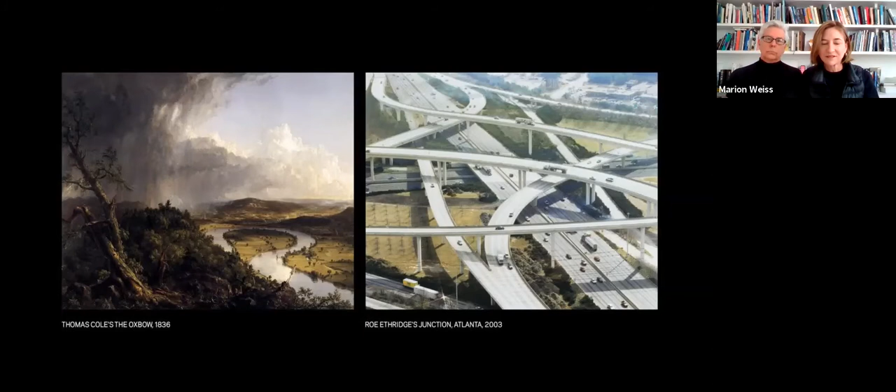While the range of each discipline has expanded, arguably one could say that heightened disciplinary distinctions have also emerged. We believe they're largely administrative, and they've placed artificial boundaries on the extent and ambitions of the architectural project. We think this is a poignant situation, particularly as we reflect on this deeply tragic pandemic that we are part of right now, which illuminates the necessary connections between all the arts and sciences to address the most globally pressing challenges of our time.

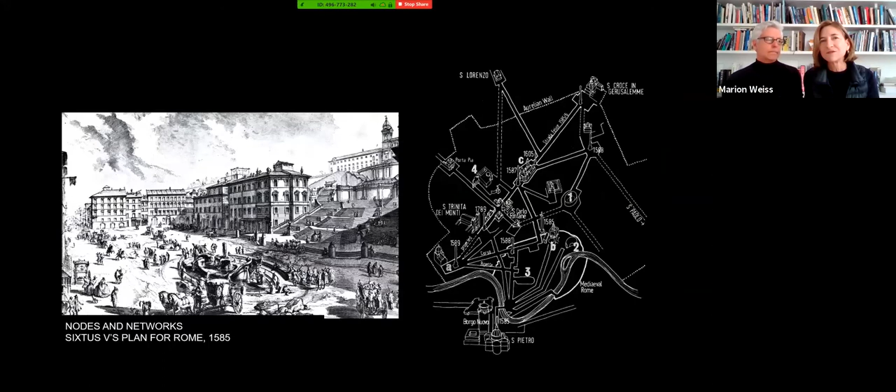There's a temptation to say that there's a utopian ideal for the perfect, contained, fortified world, whether it be the Renaissance ideal city or even the temporary encampments where encircling the wagons was the idea. Yet we believe there really is more of a networked idea, where we could leverage topographies and infrastructures to create new cultural destinations.

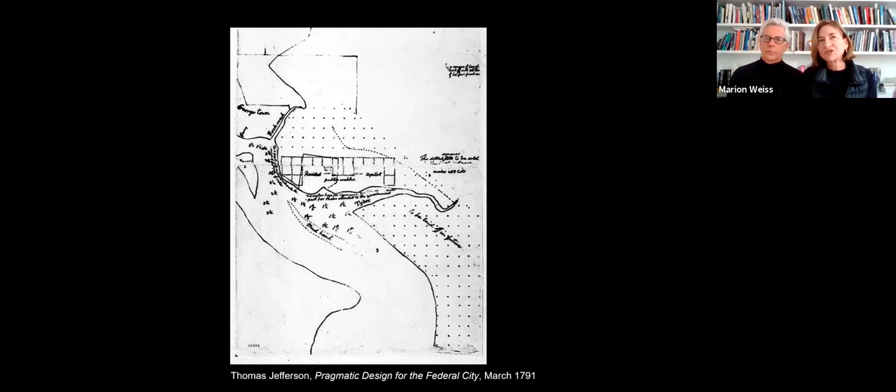Jefferson had such a strong feeling about being able to literally give measure to a site that might be amorphous between land and water, to in fact situate an idea in his drawing here for Washington, D.C. as a national capital. As he was stretching this east and west, it really was an image that we looked at with great care.

We entered the Women's Memorial Competition at Arlington Cemetery, our first project that launched our practice. Jefferson's vision was one that was carried across the river with the Memorial Bridge and terminated at Arlington Cemetery. This memorial, built to honor the women who'd served in the military since the Revolutionary War, became, in a sense, a site where an unrecognized group and an unrecognized retaining wall had an opportunity to take a forgotten site and a forgotten subject and actually break barriers, literally and figuratively, through this old retaining wall—to create a place and a space for recognition of the women who'd served.

In this first competition, which launched our practice, we had to work with the walls and retaining walls to break through the artifact of this 1927 retaining wall to create a space of light and education. Through that ascent, we connect to Arlington Cemetery grade, which with a 200-foot diameter arc of glass tablets could become literally like a journal with the binding broken, with inscriptions of and about the women who had served, becoming a luminous landscape as a foreground to the cemetery, but also allowing the sun to treat it like a kind of light narrative, so the shadows could tell that story inside the memorial gallery as well.

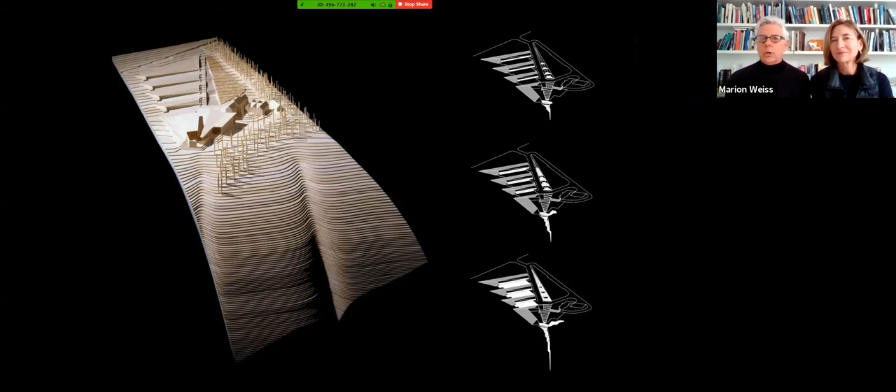A small museum engages its incredible site and organizes parking so that water can be collected. Increasingly, water is a precious resource, and even upstate New York, the presence of water being cleaned and allowed to reemerge into Lake Cayuga was an important driver for this design.

Water is actually, in a way, the first part of this narrative. You can park your car. Parking is concealed between a series of berms where water is collected, cleansed by equisetum, and then carried in this very long, very processional trough. That trough then allows you to register the entry to the museum.

Rather than one building, we broke the museum into two pavilions with a shared entry plaza, and those in turn are connected below grade, so the buildings are nested into the topography. They become part of the landform themselves. You can start to see the development of this idea where architecture both emerges from the land but is also emergent from the land, and in turn embeds itself into the topography.

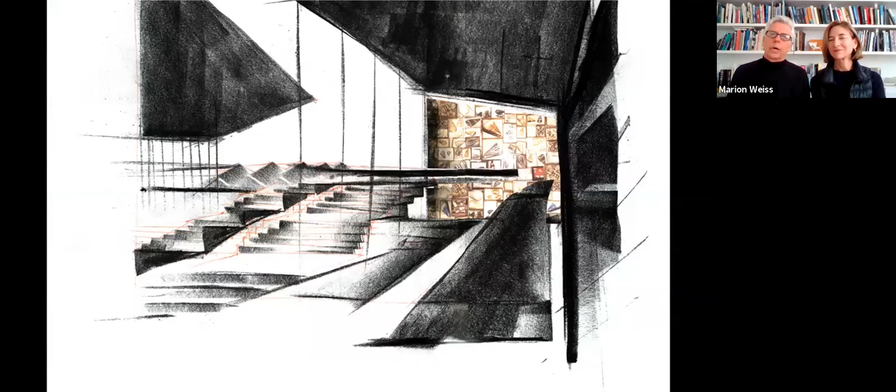Rather than create the typical black box museum where natural history is described in small, precise dioramas, we wanted to make sure this story, the story of the Finger Lakes, could be connected to the region. So the fossils displayed in this museum are found in the landscape itself, in the geology of this region. It's an idea of a kind of Guggenheim in reverse.

You enter in the present and are confronted with a right whale, this beautiful skeletal structure. Then you descend down to the lowest level where you can see a Devonian fossil, and in that fossil is the skeletal remains of a trilobite. You can remark on the similarity between present and past. That sense of being below grade in the earth is as much an idea of procession as it is revealing the artifacts of the earth.

Water is collected, as I mentioned, between these two pavilions, deposited into a glacial garden. At times it freezes. The concrete itself is produced with local stone, so it has the character of the stone you'd find on site, and in fact the imperfections of the concrete reveal a series of fossil-like indentations in the concrete itself.

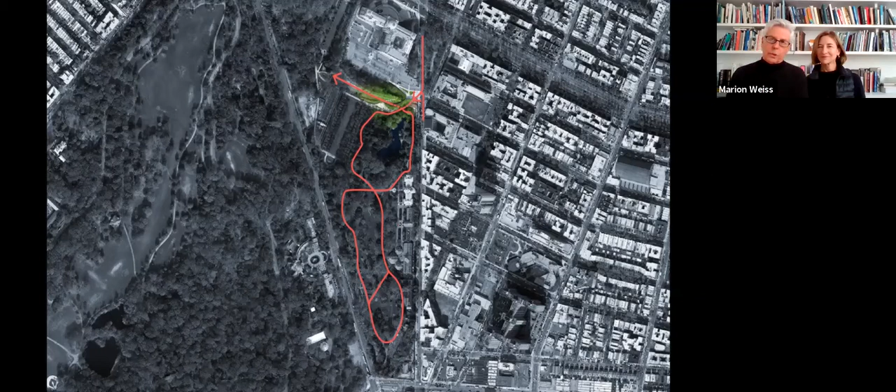So how to transition from city to garden? Rather than create a discrete, single, beautiful building, the idea was to think of the building as part of a journey, part of a narrative, a sequential act that was as much a part of the garden as it was the city. Those explorations, the origami-like studies where the building could dissolve into the garden or assert itself into the city, are evident in these early study models. So the building is overtly architectural.

As it presents itself to the city, it's broad, there's a welcome plaza. You can slide under the building, under the canopy, and never enter the building. In some sense, it's our idea that this building and other projects not be seen as objects unto themselves, but fragments of a much larger context.

So you can slide around the building, you can see it panoramically. The building's actually 400 feet long, but you never quite experience it that way. It's always an idea about seduction, rounding a corner, taking its shape from, in this case, a very beautiful cherry tree. Ultimately, you can go inside and discover the mysteries, the beauties of a botanic garden, the kind of horticultural, botanical research that occurs here.

And perhaps you could also pause in an event space that's used for a whole host of community events. Ultimately, you can enter the building from the garden itself, from an elevated sectional idea where you slide across the roof into looking down into the building.

And then here the kind of biological and mineral qualities are seen as symbiotic. The building and its landscape have a certain reciprocity, and this reciprocity is really a chameleon expression of the building. As you can see below, part architectural and above, part landscape. And yet on occasion, it becomes almost 100% natural as it reaches the end of its 400-foot stretch to become part of the garden. It really, in this case, is an inhabitable topography as its intent unfolds.

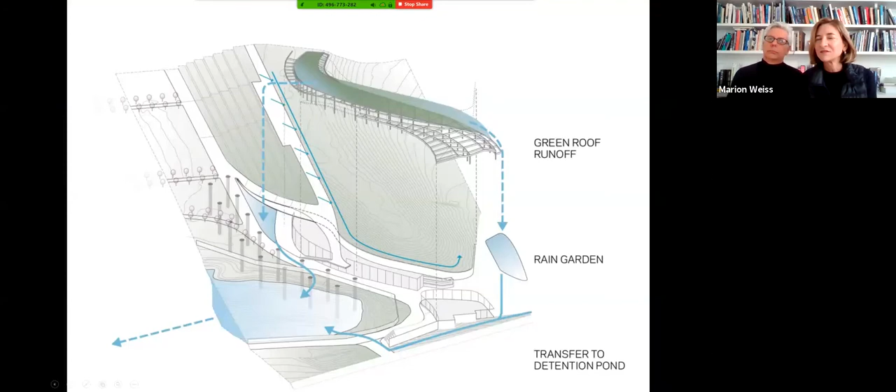And as an inhabitable topography, it actually collects water both on the roof for the garden, but also into a series of rain gardens that then filter their way into the rest of the 52-acre ecosystem, if you will, of the Brooklyn Botanic Garden.

But that idea of something that is always changing and always alive has a seasonal character. Here is the roof during the fall when the grasses acquire that strange kind of crew cut effect. And then actually from that upper Belvedere that Michael mentioned, it really is a whisper that hugs and hovers above the walkways in the section.

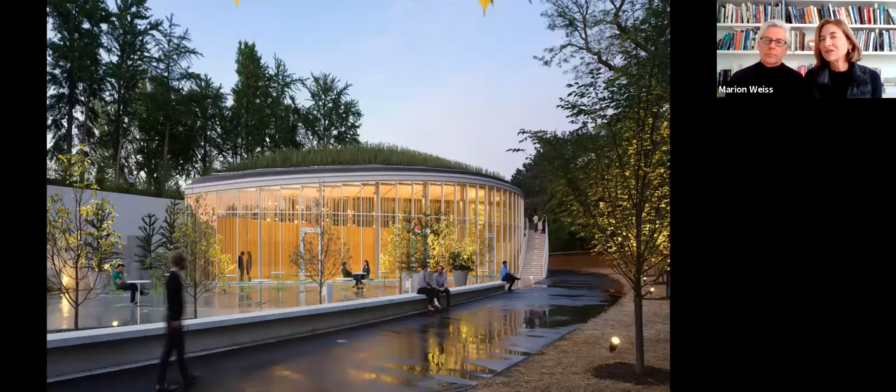And if it hovers on this end, you could say from the heart of the garden, it also becomes a kind of a lantern that's a conservatory that's really open all times of the day. And yet, certainly from the Japanese garden, we wanted it to be a whisper, barely there and barely evident except as a kind of conservatory beyond the trees.

So the question then of a visitor center that's in the garden but part of the city literally translates in this image in our mind as something that's 100% architecture and urban on one side, and then 100% natural as it makes its way into the garden.

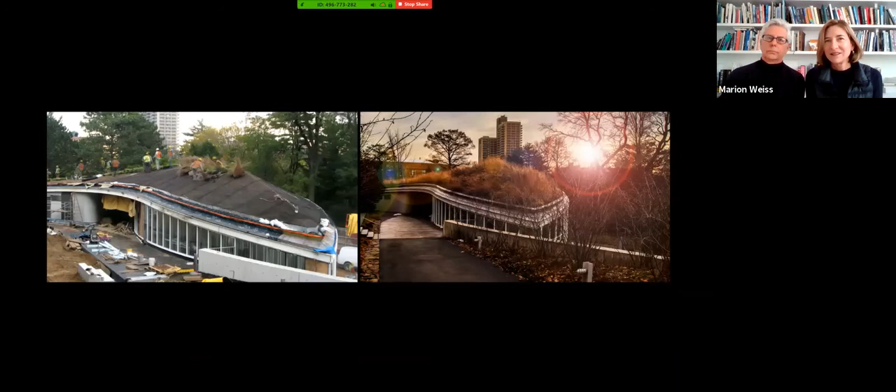That kind of cinematic expression and also the seasonal change is something that we love to see captured throughout the year. And that idea of sort of what happens when a gateway is embedded into the landscape.

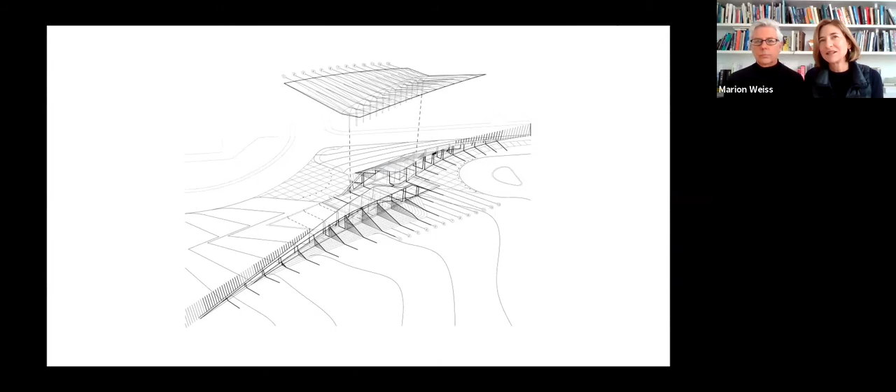In the case of the Novartis Visitor Center, it was a very different question. In this case, it is a place that literally raises the questions of what a barrier might be if it was a gateway and a threshold for security, what could it be if it were opened up ever so slightly to become something that is welcoming and yet still contains itself within the landscape. For the Novartis campus, which is a pharmaceutical campus and needs to actually keep private many of the research elements, how could they invite people to the campus and welcome them in?

So we took a very simple idea, the straight line, which was the boundary between the public and the private realm, and skewed it ever so slightly to open it up into an earthwork that could bring you in and be greeted, so that from that point, you would begin to be part of that threshold of joining the campus. And from the campus side, then, all of a sudden, the stretch of that landscape unfolds and welcomes you to a collection of buildings that are doing both research and work.

It's really this idea, though, of gently resting into the land that allows this sense of it to be almost invisible in some orientations, but certainly to the public, it is simultaneously an inhabited topography, but also a celestial soffit that is a kind of welcoming gateway 24 hours a day.

At Barnard College, the question of what a gateway is to a campus had a very different expression in the 60s. This was the Campus Center for Barnard College, done by Macintosh in the 60s, recognizing that you need to protect people from the frightening aspect of the city. So this was what remained.

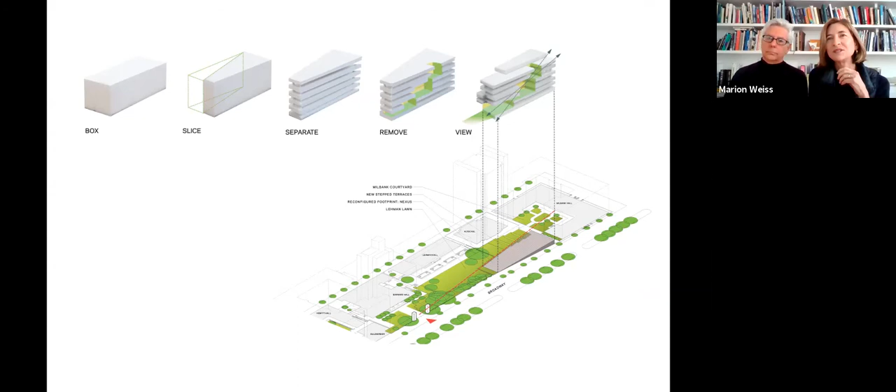In fact, right behind that wall there was a major historic garden at the core of the campus, and the expanded campus had a beautiful open lawn separated by about 20 feet of grade change. So for us, the question was, could we take a program of over 100,000 square feet that would have been a box, and taper it a bit, using the idea of landscape to pull it up and through to create a new setting?

Could we take the huge concrete foundations as our framework and basis for building a new ascending, connected campus center, art center, and performing arts center into something that would become a legible lantern as part of the city?

I think what was remarkably important to both the president and the provost at Barnard was to say that we don't want to conceal, but we want to reveal that which is going on. And that revelation is connected interdependently across the multiple floors here.

The view from the cafe below connects us ultimately to the art and architecture review spaces. It's a collapsed set of Tiffany windows from the inside that is sort of unfurled as a magic carpet, from the gallery critique spaces through the reading room and down to the cafe, et cetera.

So if on the Broadway side the facade presents itself in a very expansive way, on the campus side it was also an opportunity to create connections of a different sort.

At the time, you can start to see it was a very significant change of grade, impossible for someone in a wheelchair to move from one part of campus to the other. So architecture became an opportunity, in a way an alibi, to create a much more connected, interconnected campus.

In the foreground you can see the historic courtyard of Barnard College, and as you ascend, you reach the much more public parts of Barnard.

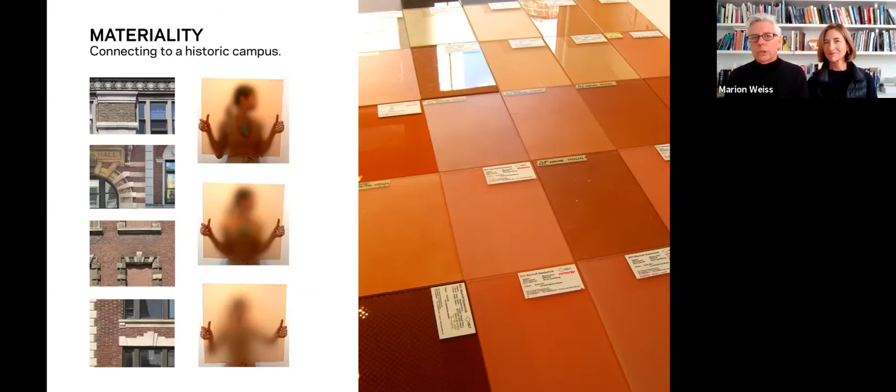Yet we were interested in the idea of asserting a certain differentiation while still paying homage to the brick campuses and the campus's neighbors. So we played with both an ancient and a contemporary material, which is glass, and looked at different ways in which glass could harmonize.

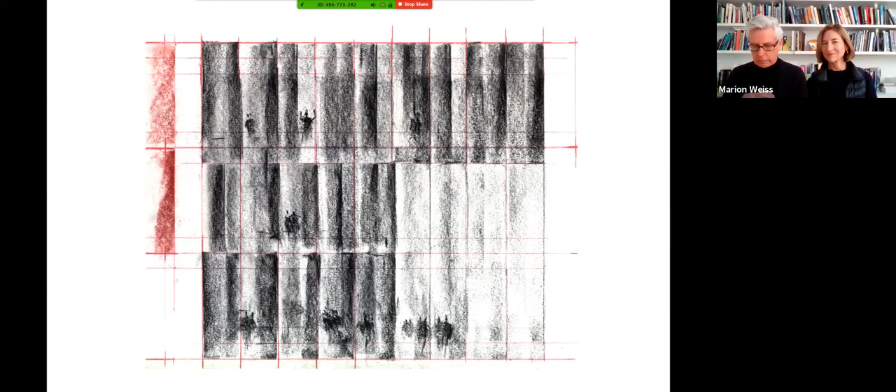That idea of harmonizing grew out of maybe the accident of a sketch. Both Marion and I find that the act of drawing is a way in which we can think about architecture. The accident of charcoal on rough paper led us to explore the idea of fritting, a kind of porcelain baked-on finish into the glass that might give an illusion of whether something was transparent, translucent, or opaque. And here you can start to see that kind of chromatic interchange between the building and its context.

In this case, very early morning light, it becomes a bright brick red. And then at night it becomes a darker bronze. In effect, the exterior of the building becomes much more prominent — in this case a frontage, a Tiffany window, as Marion mentioned, on Broadway.

A different relationship to the city, but I think equally important, we've become fascinated with ways in which we can think of campuses as being much more porous.

The idea of a fortified campus has, I think, no meaning in our contemporary culture. So the idea here was to build a nanotechnology lab, a multidisciplinary nanotechnology lab at the University of Pennsylvania, in an era that was defined by very hermetic buildings. And you can see this context, very little green space, very heavy gravity-bound buildings.

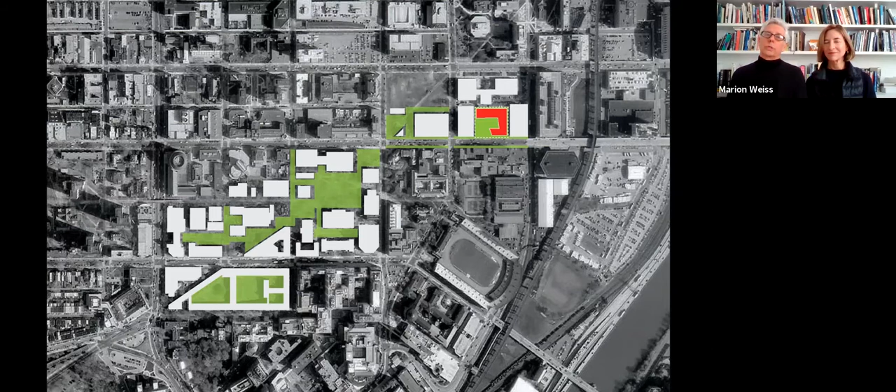Our building is located, you can see it defined by the little red figure, and the creation of another defined courtyard in this case on Walnut Street, which is one of the major streets that connects both campus and city. So the idea of this hermetic lab, which is often treated apart from its context, was to break it open and create a courtyard that would invite.

That invitation is first and foremost the creation of a public green, a truly public green that's open to the public, evident on Walnut Street, that through this thin sheet of glass reveals the incredible research and provides an invitation into the building.

The idea of collecting water—in this case the green is also a reservoir for water—means that we can use water on site and not discharge it into the storm system of Philadelphia.

So you walk through this open green into a very broad, almost public lobby, a kind of threshold space between the public street, Walnut Street, and the laboratories, which you see here defined behind this very beautiful saffron color.

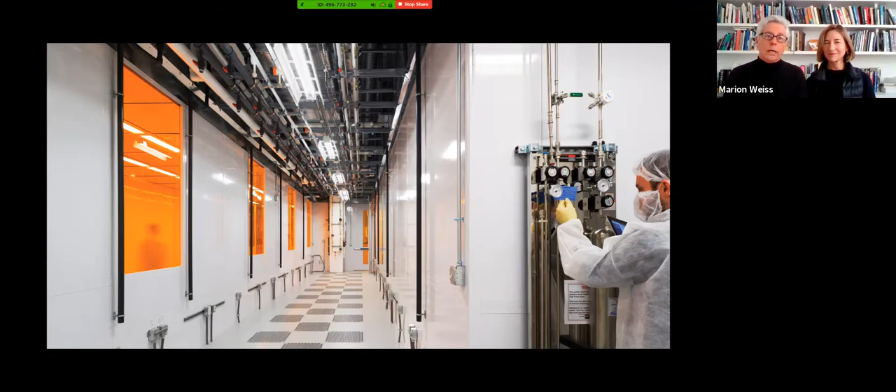That color is actually a scientifically precise color that is used in clean room design. And that clean room design is an incredible machine, beautiful in its own right, and something that rather than hide, we wanted to celebrate.

That celebration becomes an opportunity not only for the researchers to feel that they are part of a campus, but also for the visitor to feel like they're in fact a protagonist in the research that's occurring. That research is part and parcel of the definition—the architecture—of this quasi-public lobby.

The interesting element about the program here was to say, how could we actually reveal and connect all the labs and the community that are here? And what you can start to see here is a staircase that actually has a very important job.

Elevators cause vibration and electromagnetic interference, and they interfere with the work in the labs. So the stair needed to be very compelling, so that people would find it central and easy to use.

And yet also be able to collaborate on each of the intermediate levels and extend that conversation and collaboration throughout the building. That idea of it being a cross-disciplinary building means that being within eyesight of the conferences and meetings going on could actually draw a conversation into focus.

That ultimate focus, in the forum—the Glandt Forum at the very top—is a place where over 100 people could convene. And as they convene, they could become a spotlight within the city and on the campus, one that hovers over the urban edge to give a kind of frame by which we can look back at the clean room and its amber light glowing.

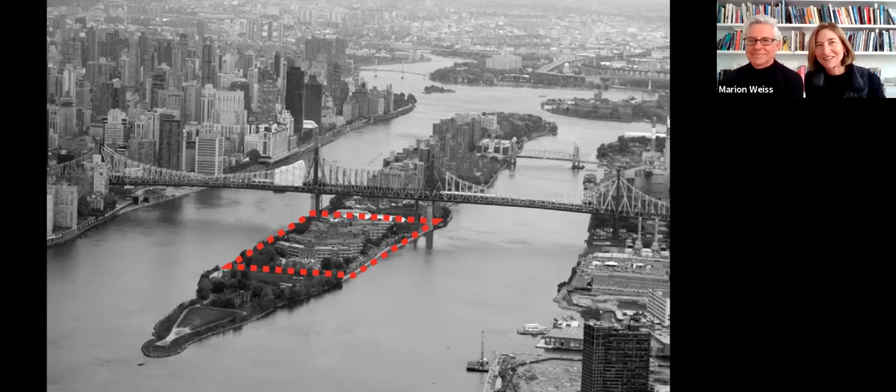Big jump here—a different kind of campus altogether. At Roosevelt Island, Cornell Tech, there was an initiative that Bloomberg was central to seeing realized, to create a campus for technology somewhere within the New York metropolitan area. Cornell Tech and Technion together came up with a bid to take this particular site, which seemed so isolated in some ways, and create it as a new central hub for Cornell Tech.

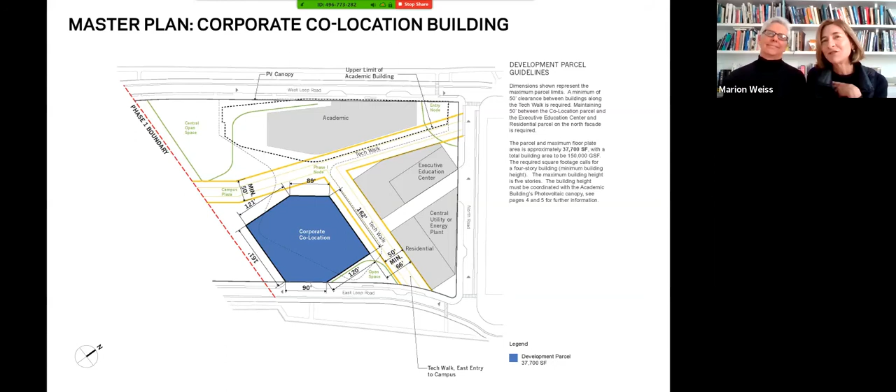Our building, the Cornell Tech co-location building, had this incredible capacity to experience river-to-river views, although the master plan identified it as a pretty awkward, blocky building of 150,000 square feet. Our first thought was, what a terrible thing to miss that opportunity to connect river-to-river views.

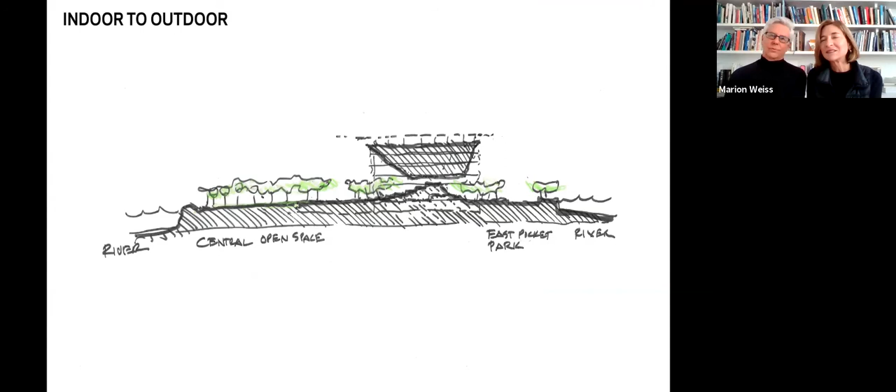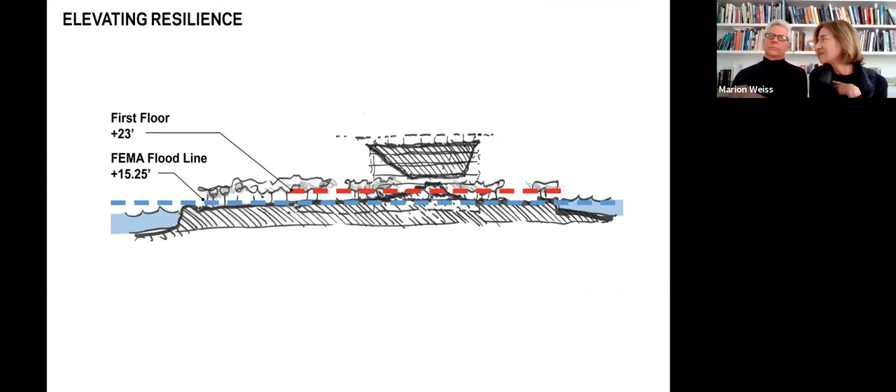So why not actually open it up into a pair of buildings that could make that connected element, and draw indoor and outdoor environments together, recognizing that being on this aquatic sort of island means we need to think about resilience in new terms. The elevating of it is not only for flood protection, but actually creates interconnected stairs to allow the community between academy and industry to connect—that's the dedicated idea of co-location.

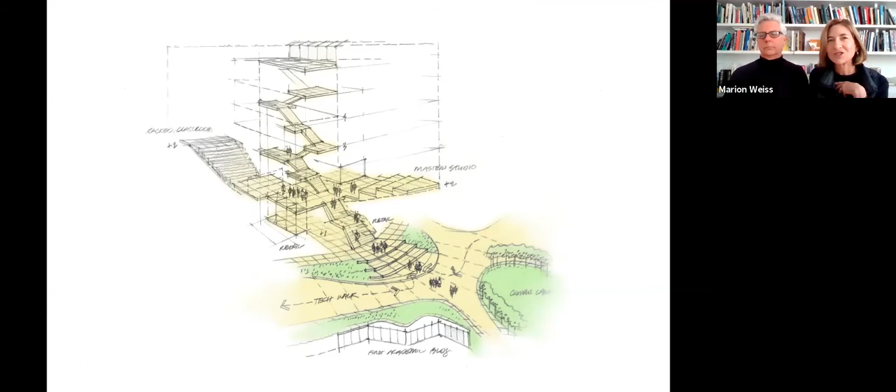Those connections join the dialogue with the other buildings, both existing and emerging on the campus. The building breaks not into one box, but two wings, to open up a central park—a central space where one could be invited into an amphitheater of green that softens the threshold connecting the community together.

This invitation, like at Penn, makes research evident—you see the building alternately spill out onto the plaza, or the plaza invade the building. In a way this is our town square, the town piazza. It's also an homage to the Spanish Steps, where the idea of topography and moving up through a building is as important as the spaces served by the stair.

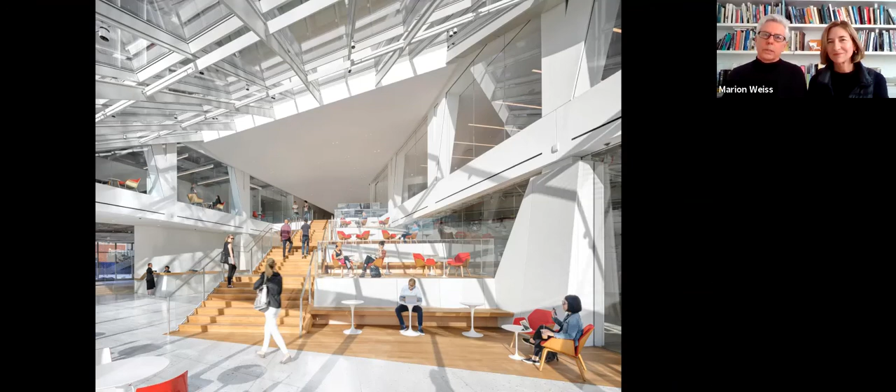So you can slide up. At times you take in views of Manhattan, at times a very beautiful view of the Queensboro Bridge and Queens in the distant background. As you move through the building you get glimpses of the research, sometimes participating in seeing the studio environment of a lot of digital research, and find places to take that intense research and move it into a more felicitous, light-filled location.

In this case, the prow of one of the two wings of the building. That prow becomes a way of locating the building in a setting and a geography of a larger context—a very important attribute. Finally, the journey ends with the hope that the researcher and the intense research occurring inside the labs becomes evident and a participant in the larger world, the larger context.

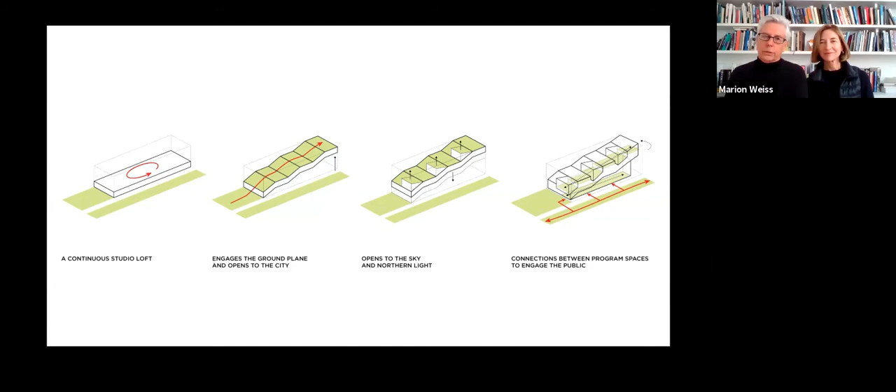A very different kind of context and setting was the opportunity to create a building for Kent State that linked the town of Kent with the university itself—a Center for Architecture and Environmental Design. Kent, in northern Ohio, was an area extraordinarily productive at the turn of the century in terms of its factories.

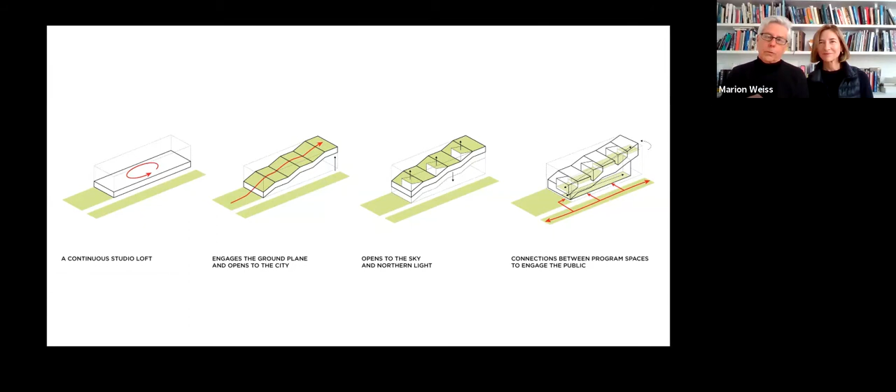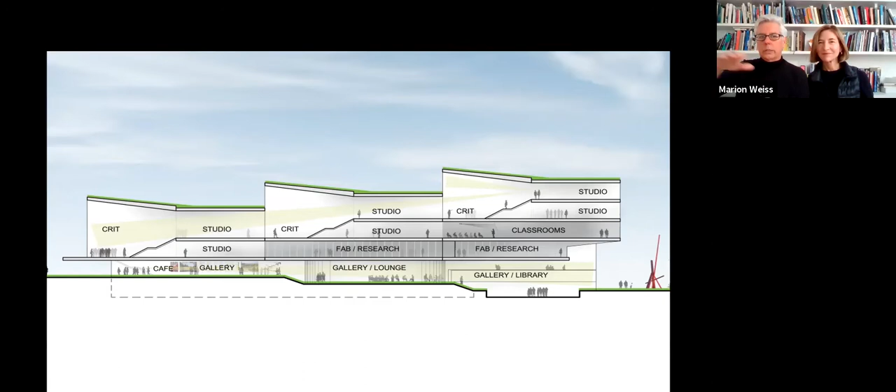We took the kind of factory loft building and elevated it to create an interior topography. The idea was to create an entirely public ground plane, public both to the town and to the campus. You can see that registration, that internal topography, where the studios ascend and alternately the public forum, the public gallery, descends to the town.

That section, that kind of MRI, registers in how the building presents itself—you can understand its formal disposition by reading its facade. Here you see the public street, cafe, library, auditorium. You can ascend from that public ground floor to the elevated topography of the studio lofts, where different disciplines—environmental design, engineering, architecture, landscape—are all interrelated, interwoven, and cohabitate.

You can look up into the different departments—instead of walls, they become different trays—or alternately look down. On the very first day everything's nicely organized, but we love the idea of debris: students appropriating their own spaces for making projects, making discoveries, entertaining different kinds of research.

On the more public side of the ground floor is the library, which at times is open to the public and becomes a much more discrete set of rooms.

Just as the building is designed to support a level of collaboration that occurs inside, we were very interested in collaborating with the architecture of the community around. The brick, the residential character of both the campus and the town, inspired us.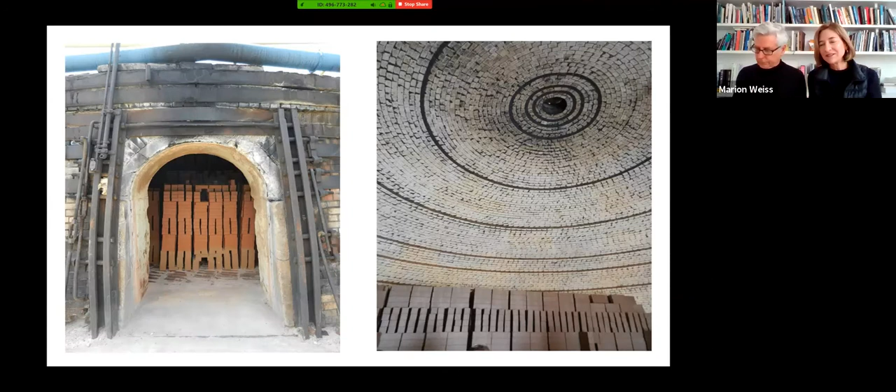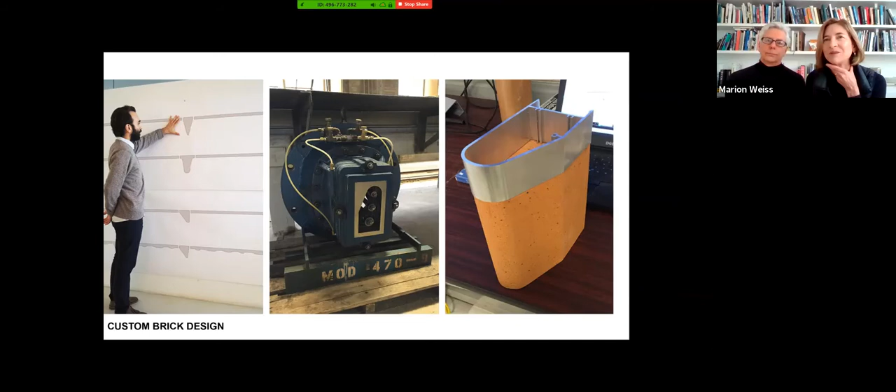We worked closely with Belden Brick to find their most ancient technology, the beehive kiln, which creates through differential heat different colors within one brick batch. We wanted to expand on that difference even further through dimension, working with them to come up with a custom brick that would let us project out in a new kind of meter, something tactile and engaging for every member, even those who aren't students.

Depending on the time of day and night, the glass reflects nature, but the brick itself meters the sunlight, casting shadows across the facade.

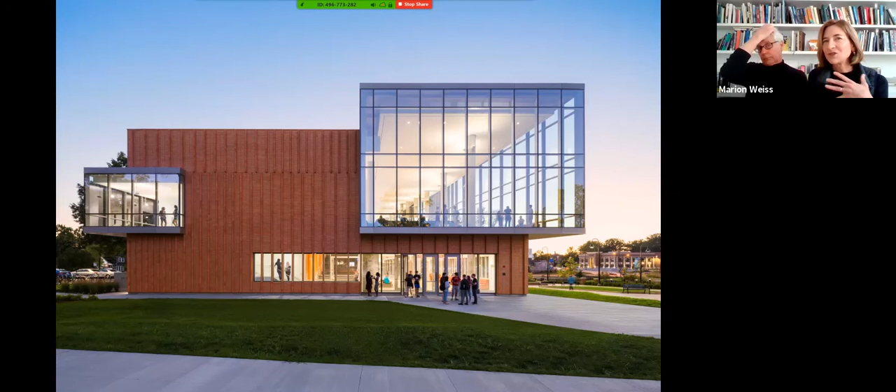This question of what advances and what recedes, especially as it faces the campus side, we wanted a great movie screen to let you know this is probably the only building in use 24 hours on campus. Truly, it's a sight to be seen.

Any architectural charrette at the end of the year is illuminated and lit up, and that lighting of each ascending tray of the studios is seen on the oblique as one walks into town. This is literally the building trying to connect town and gown. For us, it's the collapsing of these worlds of town, university, and research and invention that situates the great gift of this project in the university and in the city.

So this is very much a work in progress. We're honored to be working on reimagining the U.S. Embassy in New Delhi, India. There's an incredible wealth of inspiration from the very rich and ancient traditions of Indian architecture, but what really struck us is the relationship between garden and architecture.

They're in such a careful and delicate balance that you can't quite discern if the garden predominates or the architecture predominates. That careful balance was inspirational to how we might rethink and reimagine the embassy. This is the first building on the embassy compound, produced by Edward Durell Stone, a very beautiful building that recalls the grandeur of the Taj Mahal.

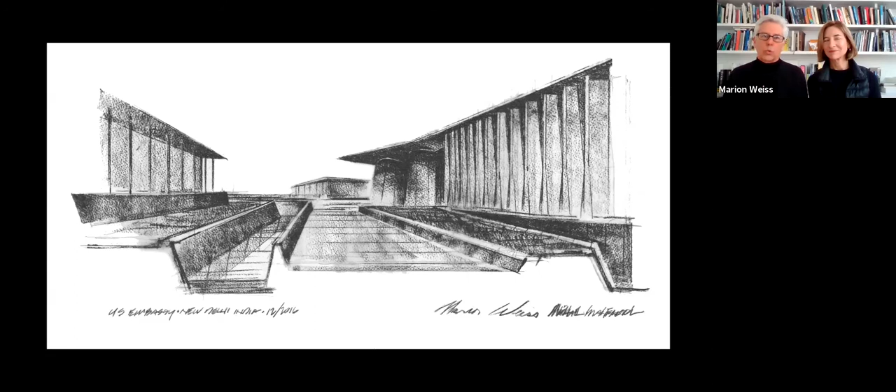In this early sketch, the Edward Durell Stone building is figured on the left-hand side of our screen, whereas our new addition pulls back and is kept at the same height in deference. The two are connected below grade through a series of adjusted platforms that catch water and bring in natural light.

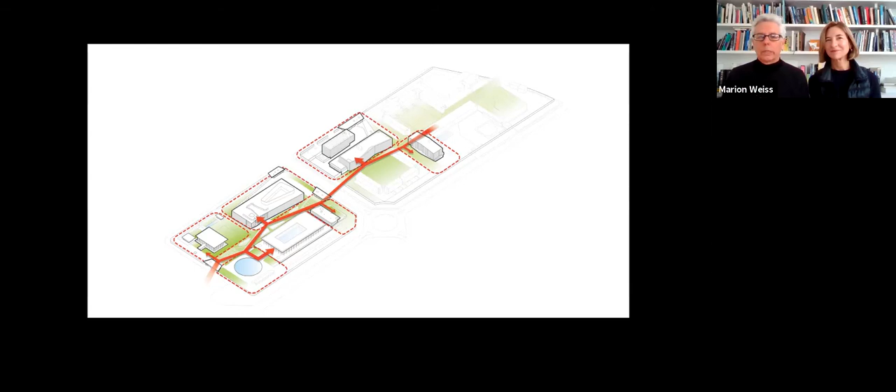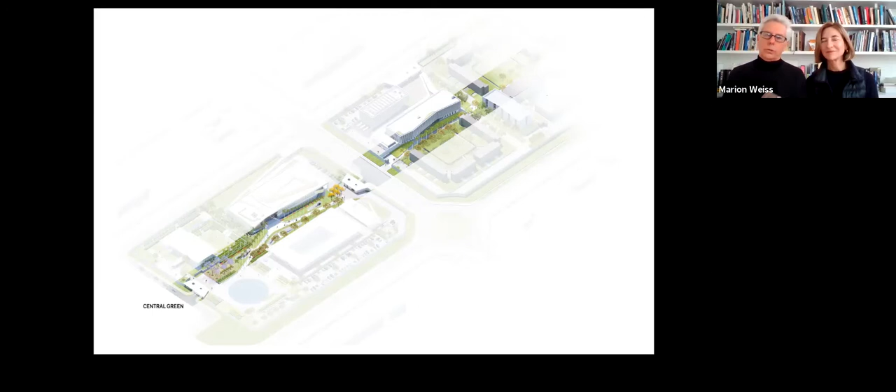The challenge here was to be somewhat oblique in terms of how new and old buildings would interchange with each other. We started by mapping out a potential route, and that route becomes a kind of tapis vert, a green carpet that, more than the architecture, connects new and old, existing and proposed.

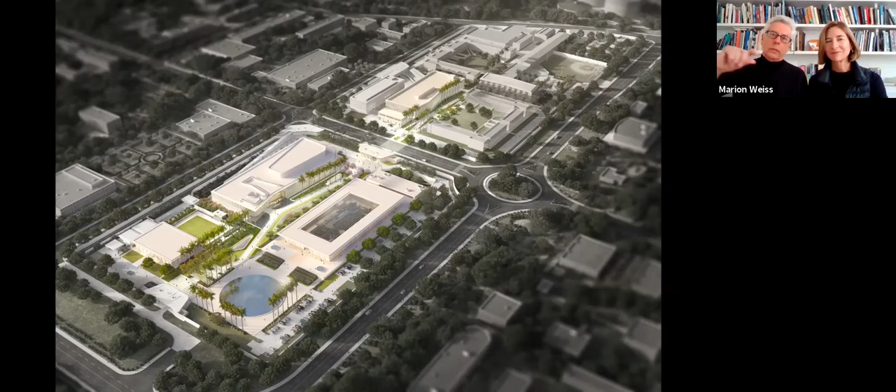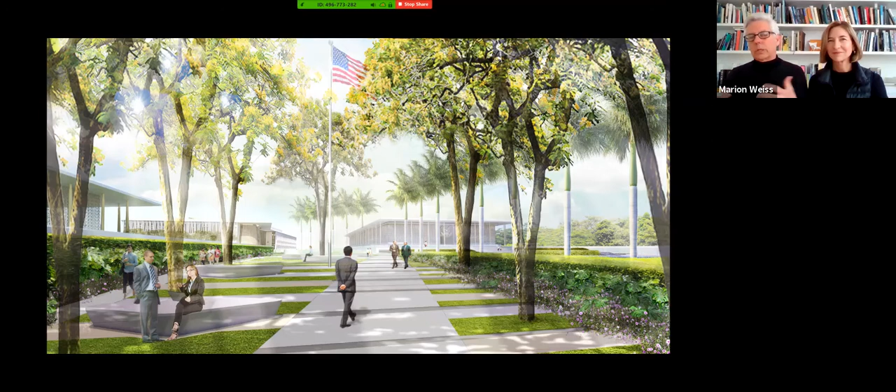Here you can start to see, probably 20 years from now, the full development of the campus. That green spine is the governing agent, our response to the great tradition of Mughal architecture.

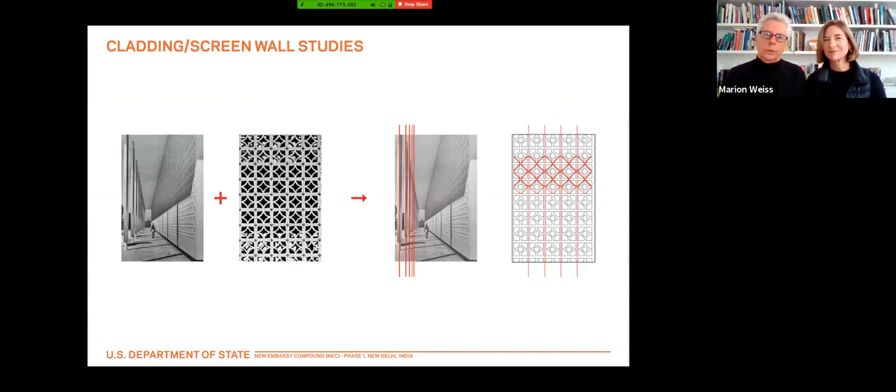The haptic realm was particularly important in a hot climate like India, where you enter through a grove of Delonix trees to provide shade and cool you. The architecture is also responsive to this climate, building on the tradition of jali screens. On our new building, you can see a woven facade which provides views in and out but still dampens the very harsh, bright sunlight.

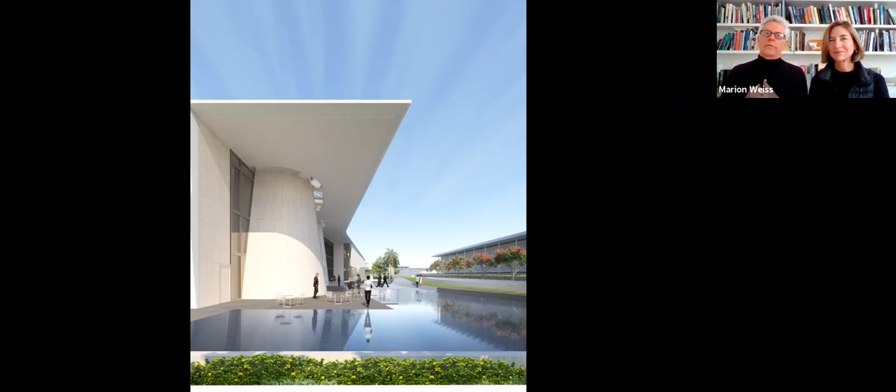Similarly, the horizontal canopy is an homage to the Edward Durell Stone building but also provides shade and captures water. The idea of capturing water, this environmental agenda which is actually quite ancient to India, is also an opportunity to think and rethink the role of diplomacy relative to the United States.

You could argue that there's an incredible history too that might be far deeper even than our diplomatic history, and that is our paleontological history. Some of you may know the La Brea tar pits. Certainly, we all grew up with it in our experiences of travel.

What has been so amazing about being fortunate to win the competition to reimagine La Brea tar pits as a master plan is to go back to the very essence of what that tar truly did, which is trap and preserve, becoming an incredibly enduring site in this urban place of Los Angeles for 365 days of excavation, revelation and research. So what a crazy thing to have science, a museum, a community park, and you're literally on Wilshire Boulevard, the Miracle Mile in Los Angeles.

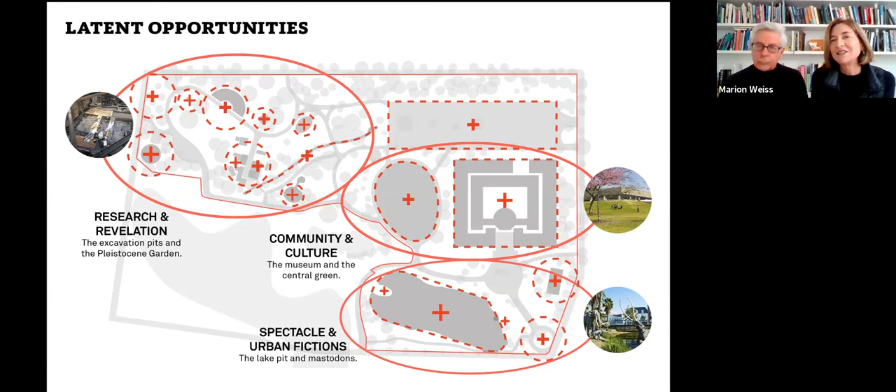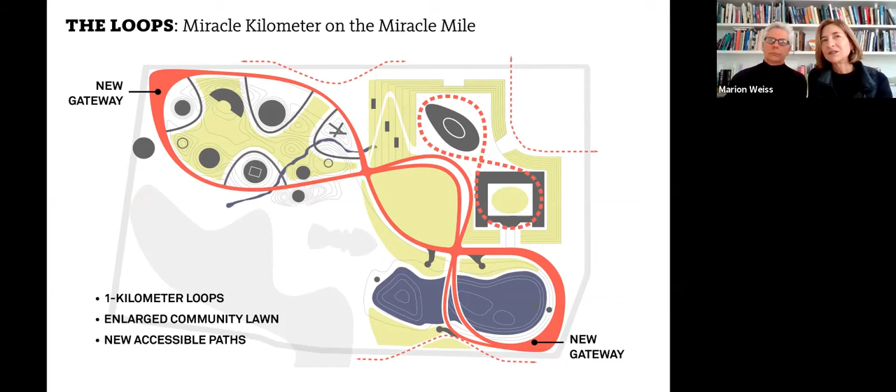As we started to map the site, these were curious things. We found that excavation and research was concentrated in one place we called research and revelation. Community and culture was concentrated around the museum and the central green, and the spectacle and urban fiction of the lake pit, the tar, and even the animated mammoths led to the question of how we could connect and create a loop that might wander through and intersperse itself between science, research, revelation, and community, creating new gateways to this lens.

As a kind of green, fertile destination, one of the few green parks in all of this area in Los Angeles, we also wanted to say that you could be pulled from one edge of the city to the other and connect all of these elements of museum, research, and community and culture.

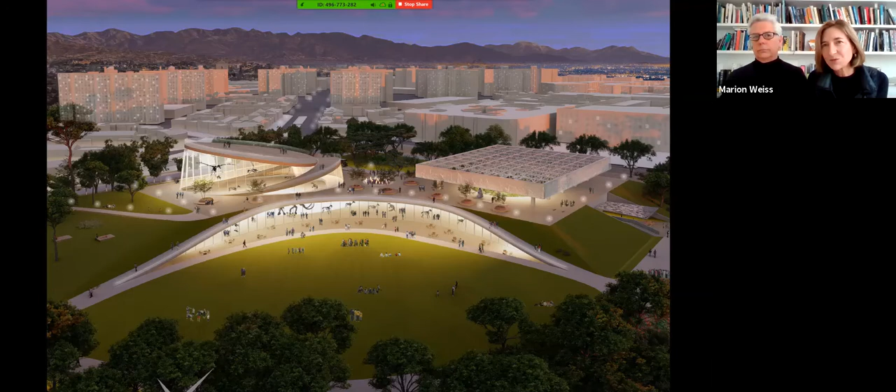The original Page Museum, which we really liked, was 100% concealed within a berm of earth. Our desire was not so much to remove it, but to build upon it with an expanded plinth, and then carve within that plinth a new window or lens into both the research, the collections, and the science, embracing and inviting the community in around this central green.

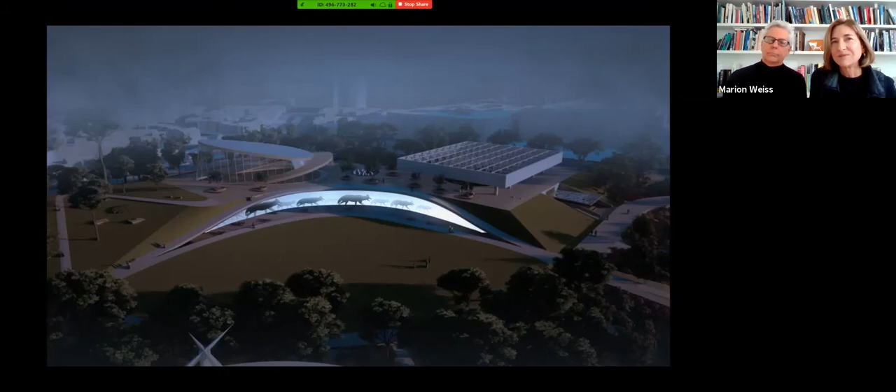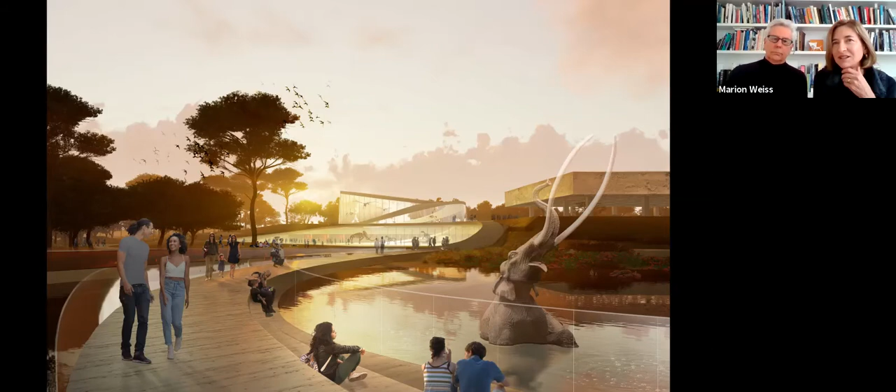It's a place where at night it could become entirely different in terms of what it projects. It could tell stories we have never seen. Ultimately, it could collapse the question of what is inside the incredible fossils in the collection, and collapse our experience of what it is to be part of the public and part of this adventure in science.

Now, from science to connections brings us to the Olympic Sculpture Park. I think that's a very interesting question when we are thinking about what it means to create a public destination in the city. In this case, it's a city and a waterfront that's been separated by infrastructure, by train lines, by highways, by contamination, by a 40-foot grade change, and in many ways kept the city from the water's edge.

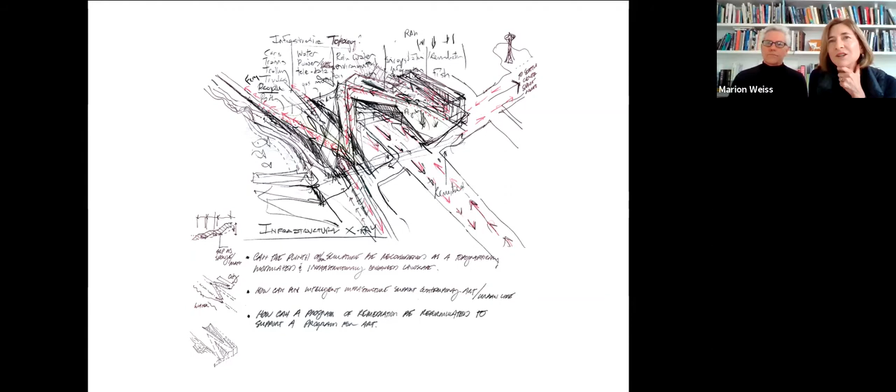When the museum asked the question of how we could create a sculpture park free and open to the public on this particular site, we discovered it was, of course, 3 sites, and went through a head-scratching infrastructural x-ray to figure out how we could do everything from connect to the city to create salmon habitat.

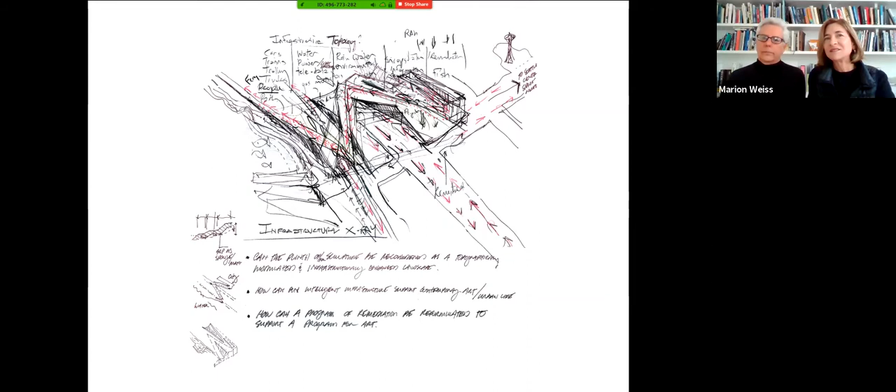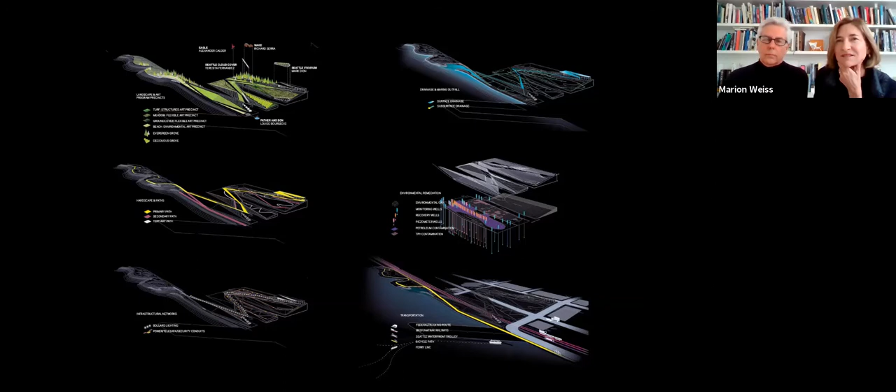That infrastructural x-ray became distilled into something very precise, a set of layers that we could go from sculpture, art, landscape, architecture, infrastructure, remediation, and then literally start to think of an MRI section that could effectively craft a disposition from urban to natural across this switchback.

So what you see here is not 3 separate sites, but one continuous landform that wanders from the city to the water's edge.

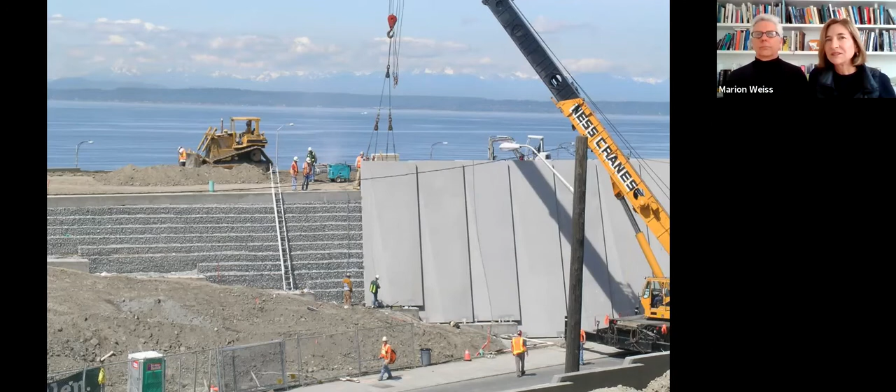200,000 cubic yards of earth were pulled from one end of the city to the other to create this new topography that could traverse the highway and make its way across the train tracks to the water's edge. It had to utilize the infrastructural language of highway building, in this case mechanically stabilized earth and precast walls, to situate the vista of art and the Olympic mountains beyond.

This idea of a wandering switchback to enhance a sense of length and distance in a park also informed the disposition of the building, which was truly a microcosm of this unfolding and ascending landscape that could open up to reveal a very simple Kunsthalle, kind of tough and raw and open to the light, in great contrast to so many of the white boxes that celebrate art.

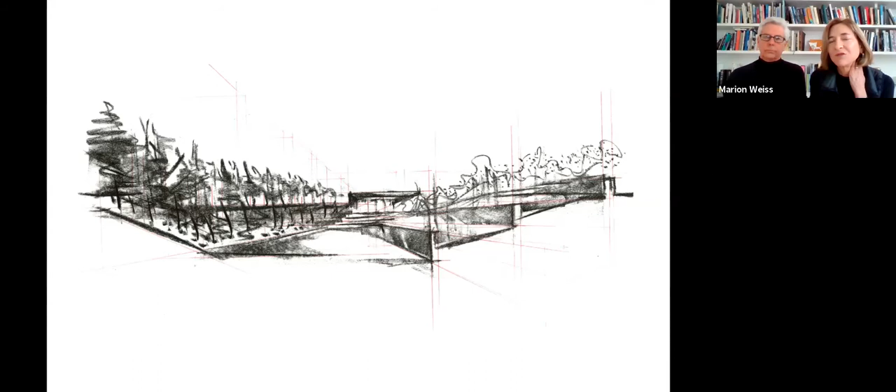In this case, you could see Pedro Reyes' work in the Capulas, leading to a kind of connection to the boundary between landscape and architecture being shaped by the new invented topography.

We like the ambiguity between what's inside and outside, what becomes an outdoor room and an indoor room. We hope the reading of this might be that the pavilion frames Richard Serra's really beautiful and fluid sculpture, in this case called Wake. Alternately, we love the idea that Wake might in fact inform the shaping of the pavilion itself. So this ambiguity between inside and outside is a provocation in terms of how to define both architecture and landscape.

We love also the fact that in public settings, people appropriate open space in ways that we never imagined. In this case, the development of an ongoing film festival and an ongoing set of performances when the weather's beautiful in Seattle. Again, never part of the program, but we love the sense that there is an opportunity to inhabit and appropriate.

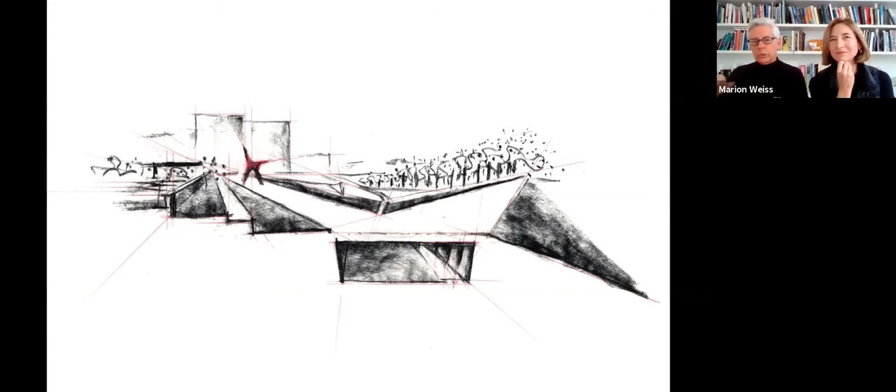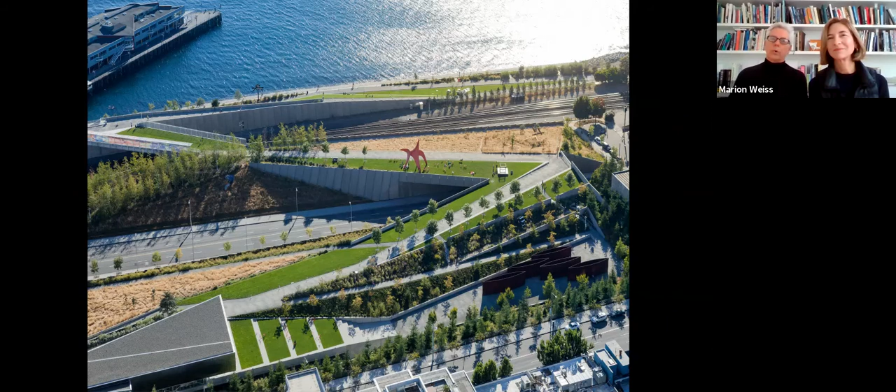This idea of appropriation has also led us to the sense that you could wander from the city to the water's edge. And in so doing, you cross the infrastructure, you don't hide it, you reveal it. In this case, we are dead center over Elliott Avenue, a very wide avenue that extends from the inner harbor to the outskirts of Seattle. So here we privilege the landscape rather than creating a bridge that reveals itself to the highway. We privilege the landscape so that you can slide over the highway and, like on a golf course, try to extend the perceptual reading of a setting so that it appears much larger than it actually is.

That sense of engagement with the city could also be a provocation to a passing driver who might not know anything about art and wonder, what is that red thing? Who is Calder and why is he doing work like that? Why did he do work like that? That provocation extends to the trains.

We were really enamored with the idea that trains could be conceived of as kinetic elements, kinetic sculptures that change the formal characteristics by their presence in the park as they slide through. In this case, under a bridge defined by a very beautiful artwork by the artist Teresita Fernandez called Seattle Cloud Cover. That artwork in a way plays optical games with the retaining walls in this sort of serendipitous moment where the light passes through and the retaining walls become reflectors for this magical quality.

If this magical quality extends to the water's edge, it's our hope that we could finally reconnect to the city. The city's connection to the water was defined by parking, in this case, parking with a great view, but you could never quite touch the water. So here was an opportunity to work with the city to create a new public waterfront, a waterfront that would define itself as both a setting for art or just simply a place to fall asleep and take a nap.

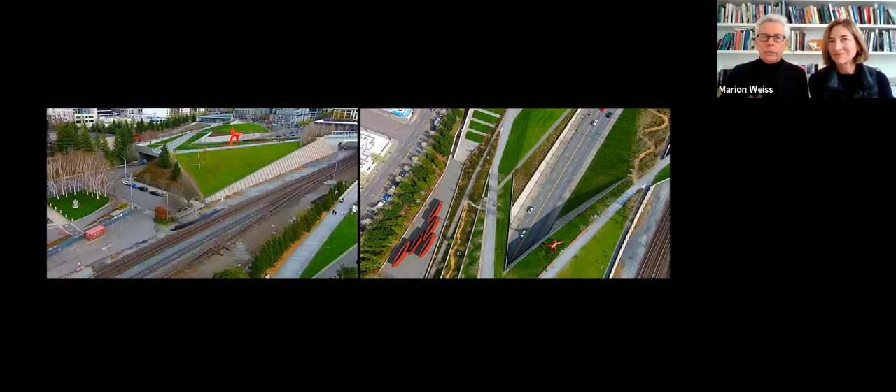We'd like to just share a film, and we've included film to try to give you a sense of movement through sound, in this case, sounds of the city, which are very powerful.

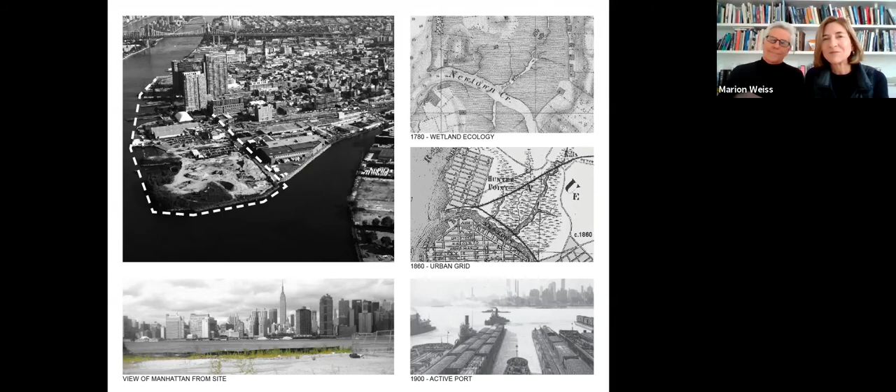It concealed what had been, in fact, an incredible wetland before it became this place of industry. And when you think of all those histories coming together, what was left over was this curious collection of buildings, a contaminated site, and a very irregular edge that was fortified on one side and very rough and raw on the other.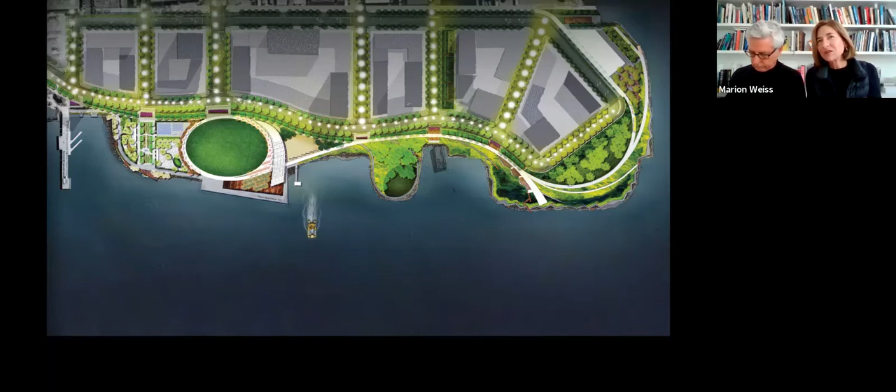So what became interesting for us was to say, in our collaboration with EDC, with ARUP, with Thomas Balsley Associates, Parks Department, what's the question that needs to be asked here? How can we create something in advance of a development that was to follow, as a destination park that would connect literally all these different precincts?

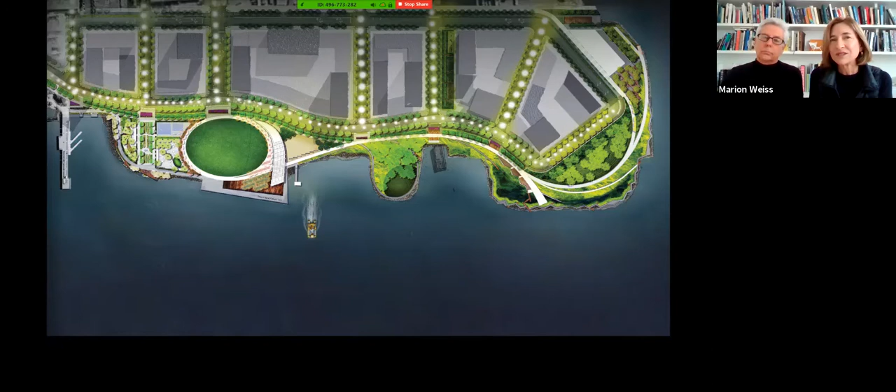So what you see is a kind of translation of 3,800 linear feet of shoreline, where part of it is hard, to the left side of your screen, but roughly 88% of it could be a soft edge, where we re-envision what a wetland landscape might be to be inhabited.

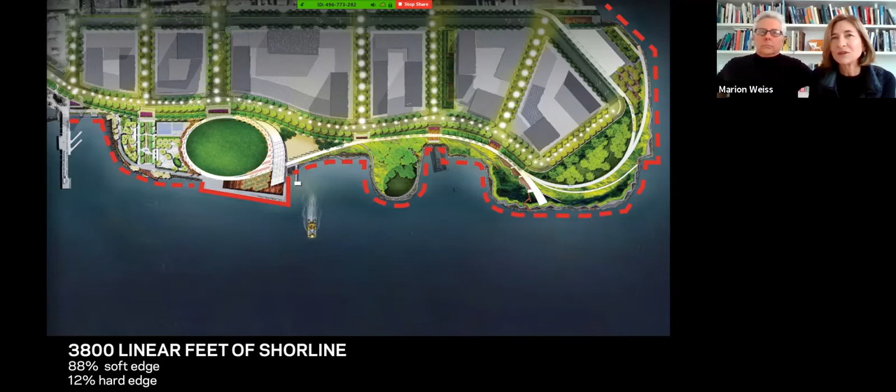The design is really a lasso-like link that concentrates at one end the kind of active recreation, and at the other unfurls with a cantilevered overlook that looks back towards the city and capitalizes on the fact that this is probably the most topographically diverse site in all of Long Island City.

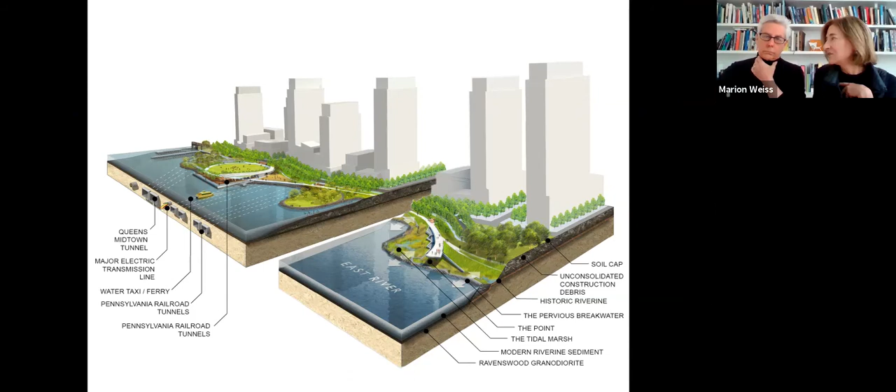Now, what you'll start to see is that resilience really has to be taken into consideration with any waterfront site. And Hurricane Sandy in 2012 brought it into focus.

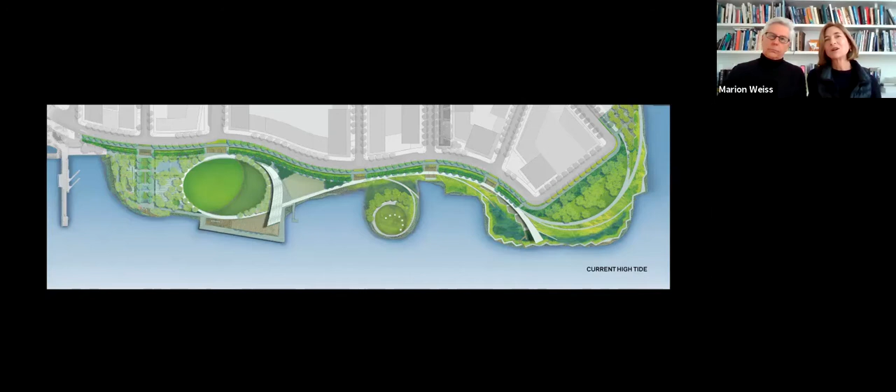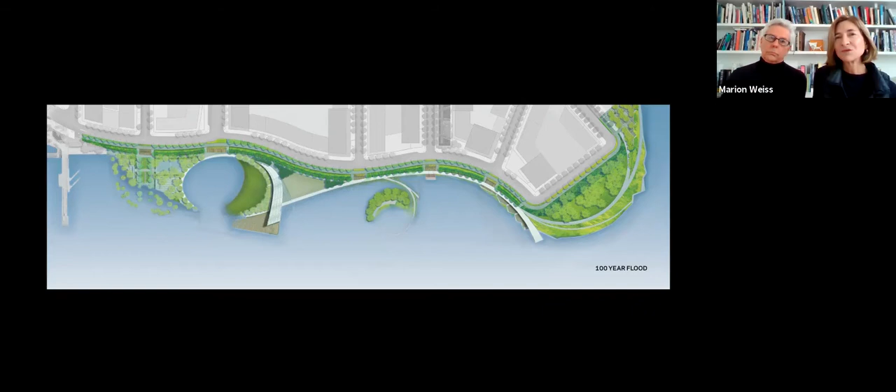It had been our premise, as we were thinking about this park, to recognize that we needed not so much to resist water to protect the upland community, but to think about new forms of resilience by embracing the water and designing in such a way that we could envision the central green, and even the island that you see floating and almost disappearing here, as vulnerable to but welcoming the provocation of water.

So this was a rendering that wasn't necessarily enthusiastically embraced initially, but after Hurricane Sandy, I think it became a symbol, the poster child that this project could become for future parks along the water's edge, to actually embrace both the idea of a community destination but also a place that could protect and receive water.

Underneath this green here is a great cistern that collects, so there's a catch and release program for water. But what you can also see is this kind of crescent of green facing the core central green, which is then backed by a pavilion.

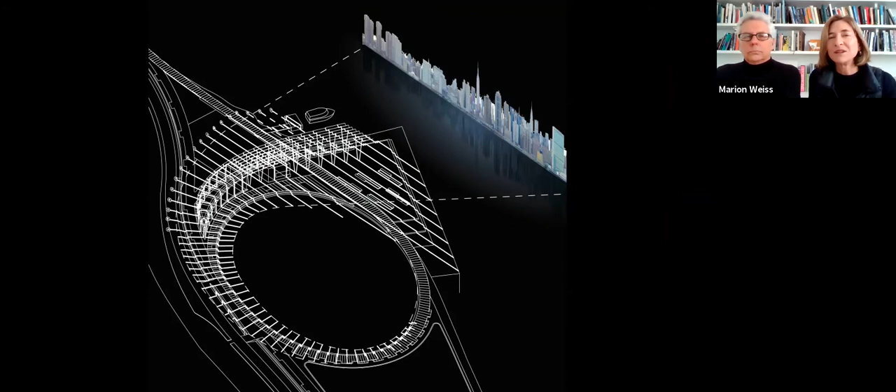There had been a query about four architectural objects that would be on the site: a shade pavilion, a concession building, restrooms, a maintenance building. And we thought it would be far better to pull these all together into something that could be barely there at one end and open and unfurl with a lens to the city.

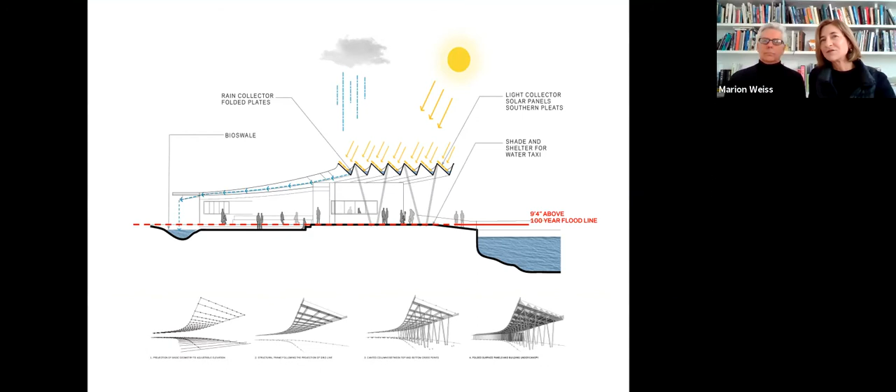And so what you can see with this pavilion itself is that it is a hardworking pavilion, in that while it can actually host and change large communities, it's one that could take a southern-facing edge of the roof to collect solar energy so that the lighting for the park could be powered by this rooftop, but also collect water so that it could tip down the channels and help irrigate the park.

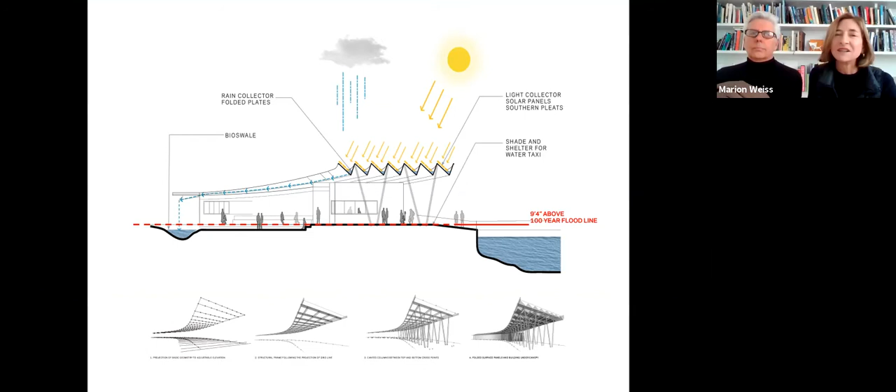And so that idea of being a hardworking element that is barely there is one that we also hope to be a kind of friendly face to all these things that could be objects one after another, but now they are one because of another.

It's also a beach on the other side of the pavilion, where what had been water taxi beach can now actually be a family beach. And there are even older artifacts, like the rails that used to be the places of exchange, that are now places of cultivation and invitations for the rail garden for the community.

And truly, though, it is something interesting to be able to invent a park in advance of the development of the city that follows. So the dedicated precincts along this first phase actually situated us for the second phase of the project that followed, the threshold link here being the place where the ferry comes and goes.

So this becomes a new ferry connection, which is becoming increasingly important to the life of many cities, and certainly New York, whose real history, whose genesis was all about its harbor and its waterfront. But we were also intrigued with the idea of using architecture to make measurable what might be seen but not quite understood. So the sense of giving measure to this spectacular view was something we hoped would become apparent even to the most casual passersby.

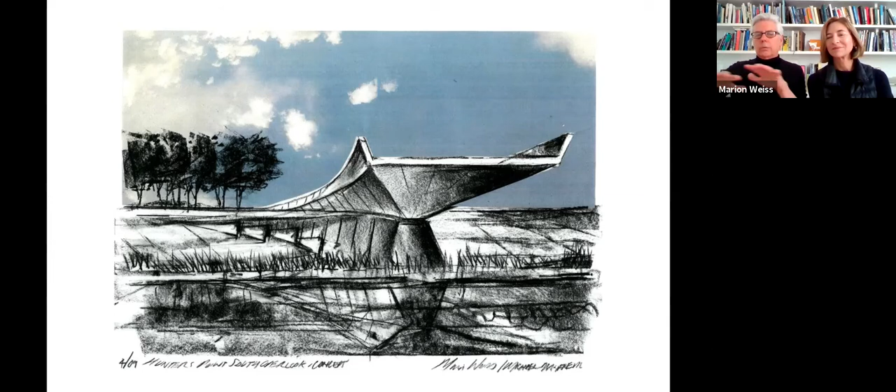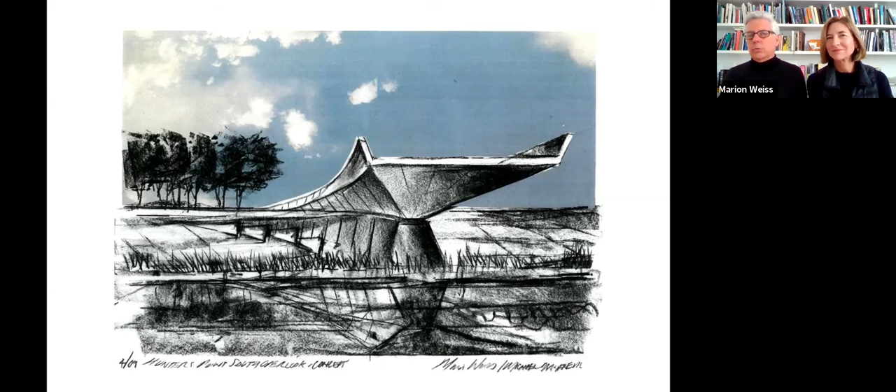By levitating, you get a much more panoramic view, but you can also create a new wetland, which you see at the base of this giant, about 64-foot cantilever overlook. You can see the creation, or recreation, of the wetlands that were there. This also involved ingenious construction. Our work with a whole host of incredible collaborators allowed us, in this case, to work with a boat builder in Maine and to prefabricate large chunks of this structure, bring them and hoist them onto the site.

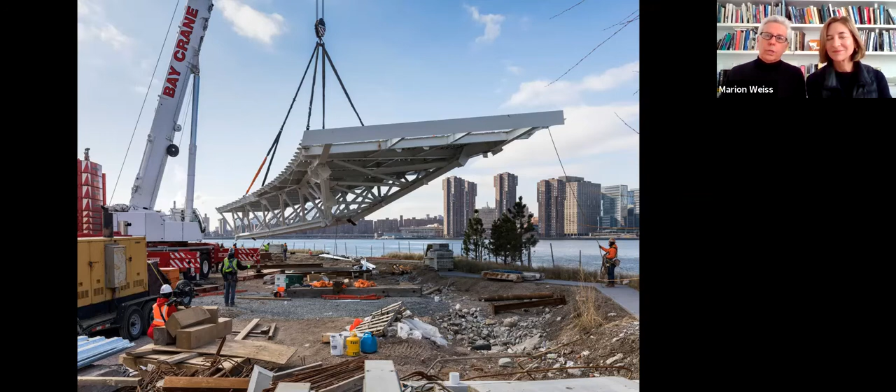So here you can start to see that overlook as a companion, or in reciprocal relationship, to the new constructed wetlands. These wetlands are completely artificial, highly engineered, but they're a way of developing an idea of resilience—rather than fighting the influx of rising tides, letting that kind of jujitsu work with the dynamic of a more fluid, sponge-like waterfront.

So at times, depending on the season, they're extremely verdant, almost emerald-like. At times you're above, very much in the artifice of the city. At times you almost literally feel like you're walking on water. And that sense of dynamic between city and waterfront is how we hope this park will be perceived and inhabited.